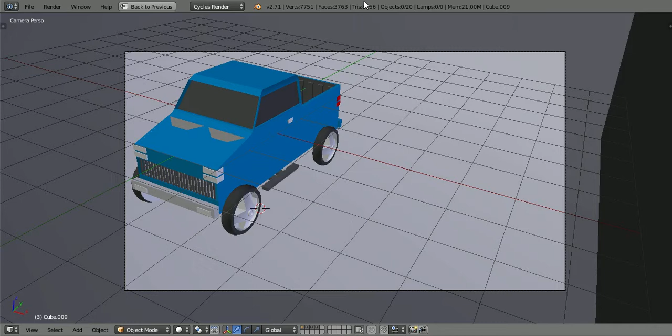So in the last episode I was talking about adding a turbo to this beast of a magnificent four-cylinder engine. It is just so fantastic.

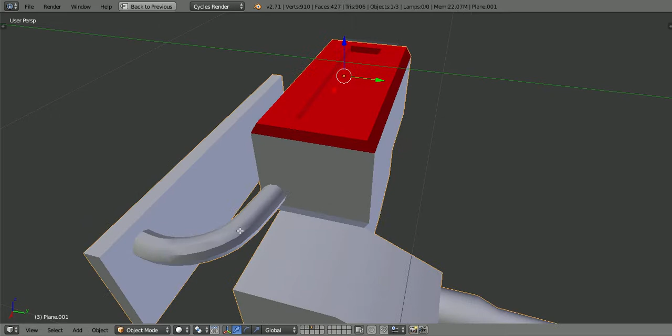So first of all we need to get rid of these pipes. All of them. This one, I'm not sure. Yeah, might as well.

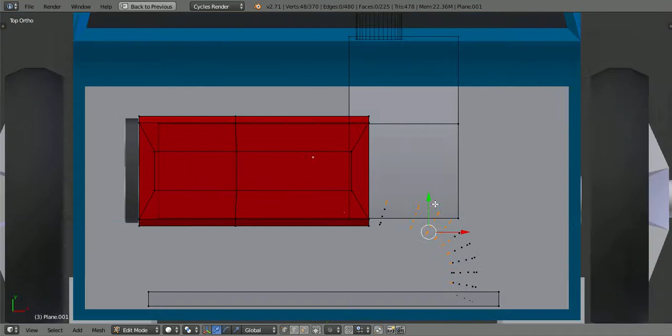Now there's not much space in this engine bay. Unless I move... Fuck, shit. One second, I keep hitting delete faces only. Ah, for fuck's sake. Not faces only, faces or vertices.

There we go. So there's not much space in this engine bay. Let me just link them up together, all the engine parts together. Now I'm going to have to force some space in here, but I'm going to need space behind the engine as well, so it's going to be a tight fit.

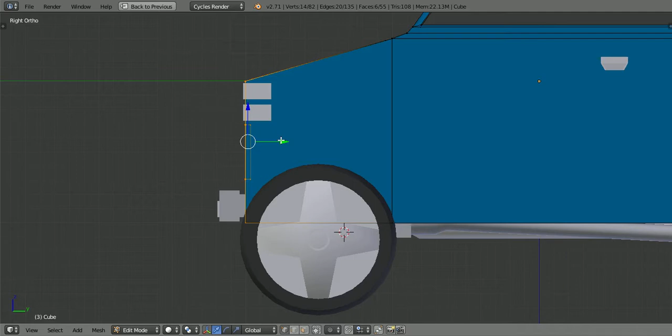Unless we make the bonnet longer, which I think I might do. So I'm going to use control and just 1, 2, 3 along the grid.

And now everything else just needs to go up 1, 2, 3 on the grid, like so. And do the same with the grill, 1, 2, 3, same with the hood, 1, 2, 3, and what else? The bumper, 1, 2, 3. I think that's it.

I'm also going to raise the front up a bit, like that maybe. Yeah. Just do the same there, and just like that.

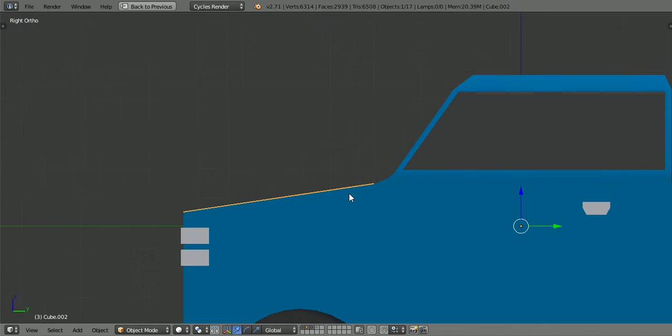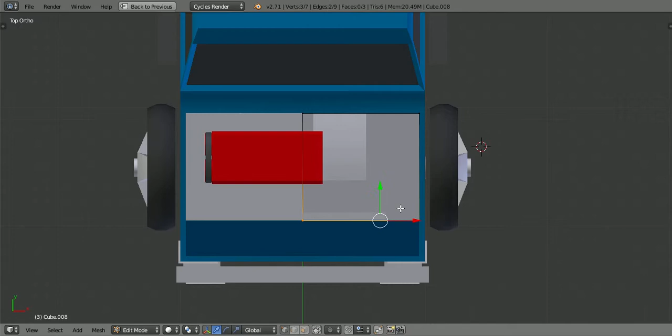I'm going to make a new bonnet. Oh, I've got to do that engine bay. So 1, 2, 3, and how many up? 1 up. And then just select that like that. And there's our hood.

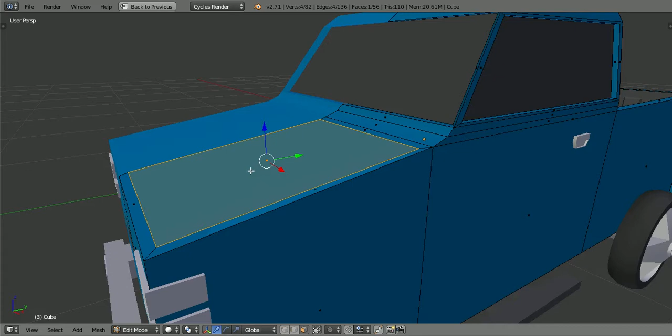And I'll just separate it, like so. I wouldn't add any cooling into this one, maybe just a center thing like this. This is way too many polys, holy shit.

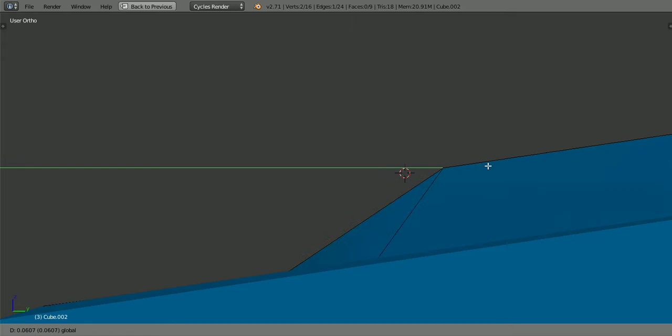But it is so totally worth it because it looks so badass. Let me just mark that as sharp - I don't know the key combination, so I just press... If you ever want to know what a key combination for anything is, or whatever a command is, press space and search it.

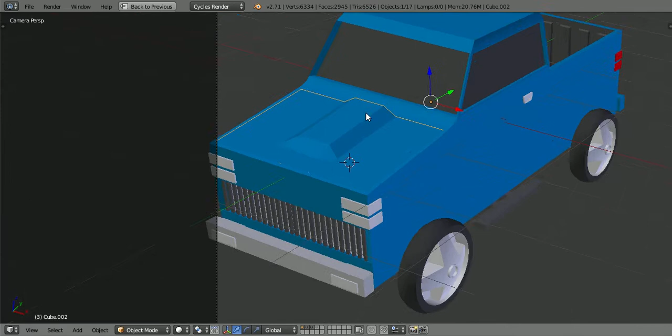Nah. Maybe we should just have a standard hood, you know, none of this hocus pocus, bocus, locus, monocus, tocus, crouching tiger, dunking hippopotamus, basketball.

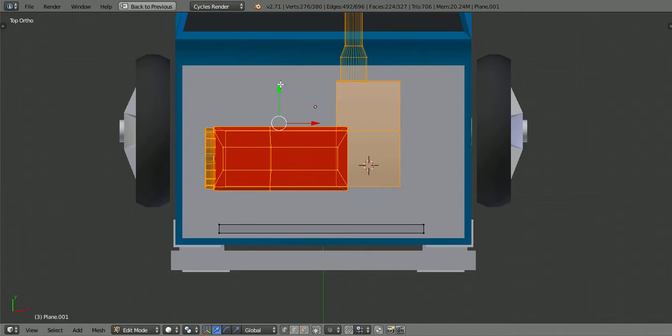And there we go. And just assign that to number 2, assign those steps back to number 1. And you see, a lot more space in this engine bay. Because now we can actually - I want to just separate that maybe, no. Now we actually have space inside the engine bay to turbocharge this beast.

Which is going to be fantastic, because this thing is just too big for this crappy engine. So...

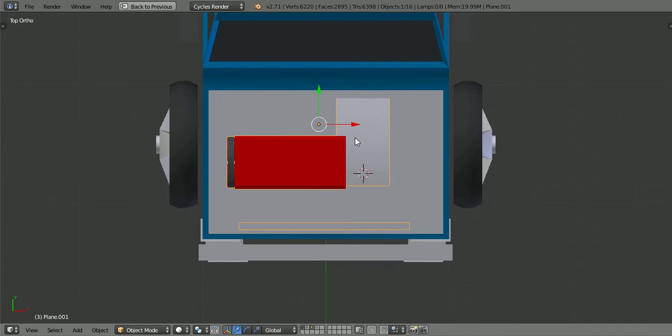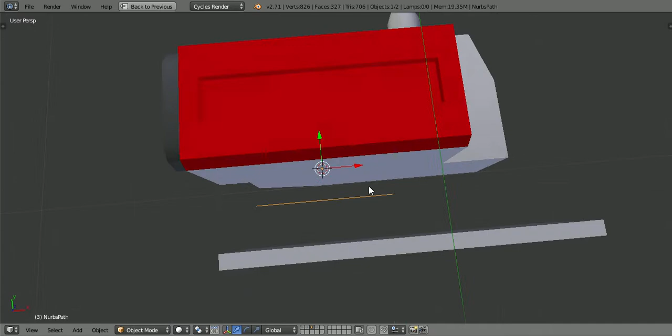First up, we're going to use this view. We are going to center on this point, and what we're going to use is a path. So we're going to go down to here, go to curve, and click path. And here you'll see this - it's got nodes, basically similar to vertices, but they are the point of each point of the curve, and you can just adjust them like that and make a curve like that. See?

Now we want to make this a pipe, of course. So if we come over here to this one here, right here, and click the curve button thing, we firstly want to select full. I'll show you why. Because if you go to depth, we're going to put in a depth of 0.01.

Hit Control A. Okay, just double check, 0.02. And give it a resolution of 3. Now you'll see it only makes half a circle, so that will only make the back, that'll only make the front, and this will make the full cylinder.

Now this resolution over here will adjust how many vertices are in it, like that. You see, you don't need any more than 3 for this, really, because the smoothing shader thing will help. Now it comes stock with 1, 2, 3, 4, 5 of these, and... just had a moment of deja vu there.

So you're going to see what happens after we've deleted them. This never used to happen on 2.49, but it does on this version. We're going to do it like this - but look, it makes the tube really weird with very sharp angles.

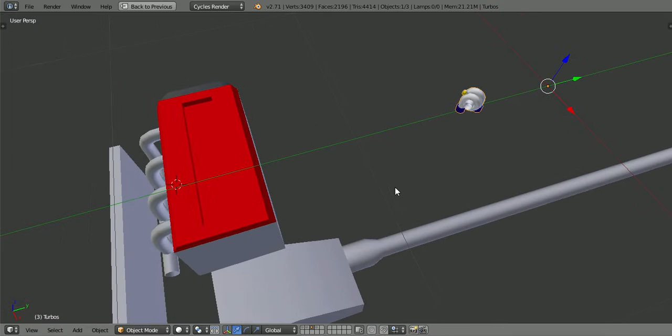That's my turbo. It's very high poly. Also, we've just realized just how big this model is.

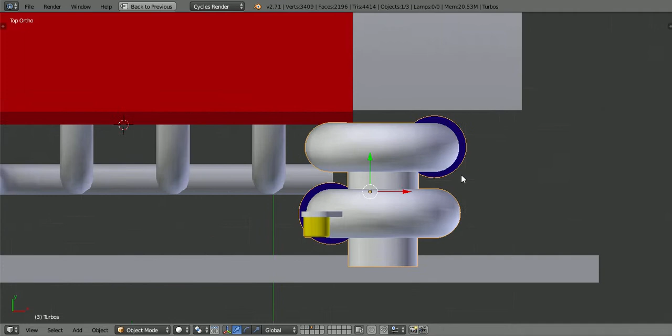Okay, what I'm going to do is hit Control Shift Alt C and set origin to center of mass - that'll origin it right to the middle, like so. I'm going to try and rotate it so it's dead center like that. Yep, it's -1, 1, minus 0.5. That's pretty much dead center - I'm not going to get any better than that.

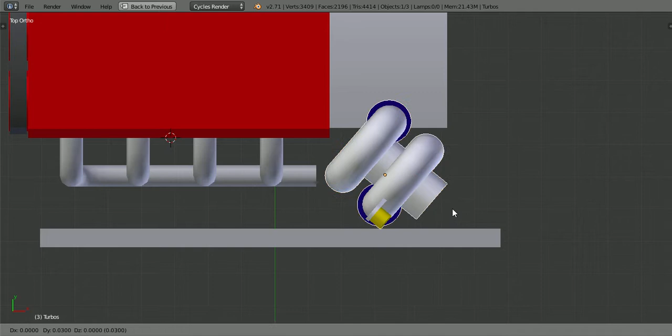Yeah, that's good. And you know what, this is the perfect size for the turbo. I'm not making it any smaller, because you know what - fuck yeah. One thing I am going to get rid of maybe is this, because this is the very high poly part of the turbo.

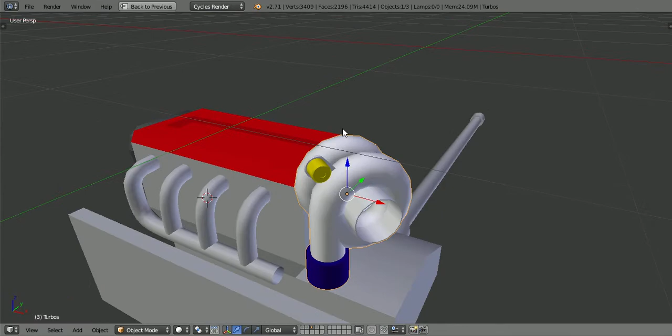I mean, look, let's select it - this part alone is 400, about 560 tris. That's quite a lot.

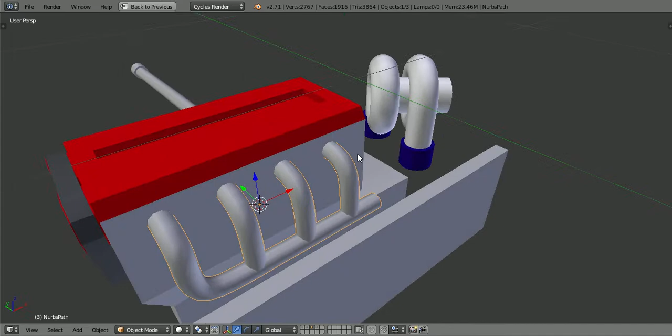It's not really that comparatively correct - that was with Subsurf 1 on. Maybe these are a bit too small, yeah. Maybe I'll make them 0.04. 0.05, hell yeah. It's actually not too far-fetched.

If it's a modified engine with such a big turbo, I guess. So I just gotta remember how it works - cold air intake, dump pipe, going in.

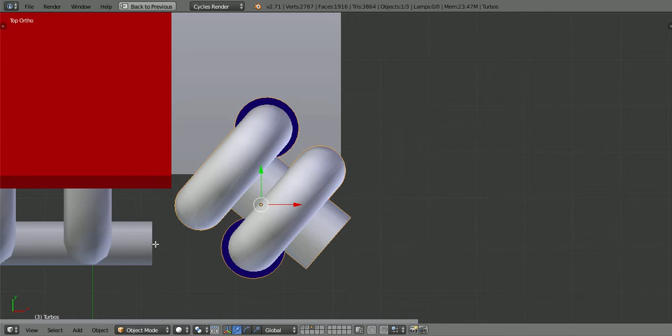Okay, good. I'm just gonna make this a separate part and separate it. And what I'm gonna do is hit H on it and it will hide it. Now if I want to get it back, I'll just press Alt H - not H, Alt H. So you press H, lose it, like that. Good.

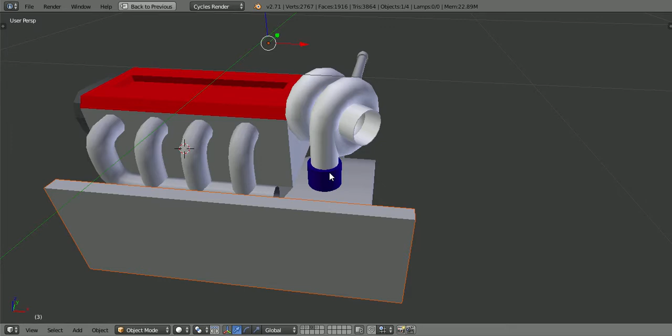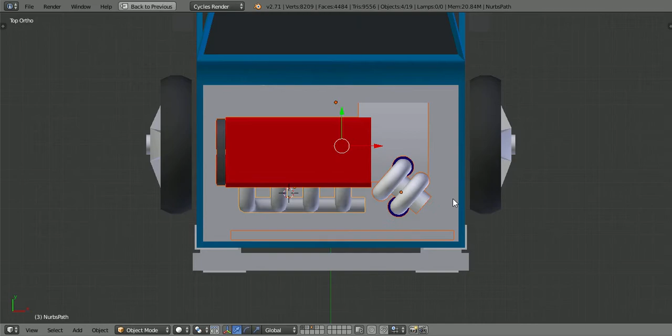Now, you just got to see where this is in the engine. This is a tiny engine - I think we can probably get away with making this engine a bit bigger. So 1, 2, yeah, like that. We're gonna say it's a big 4-cylinder engine. Yes, there we go, that's more like it.

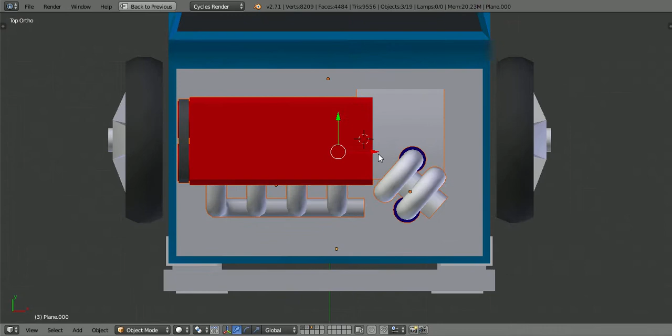Get that right up there. Do the center of mass thing. And then just kind of do this and that, because I want a bit of space for a cold air intake kind of thing.

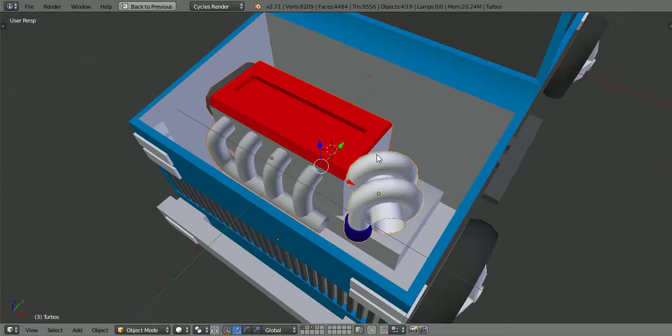The whole engine needs to come up a lot - that's where it will be in the engine bay. By the way, this engine is oversized, but it's relatively correct in the way an engine would work, so bear with me. It's a big engine, but who cares? We're gonna hide that again so we can work on this.

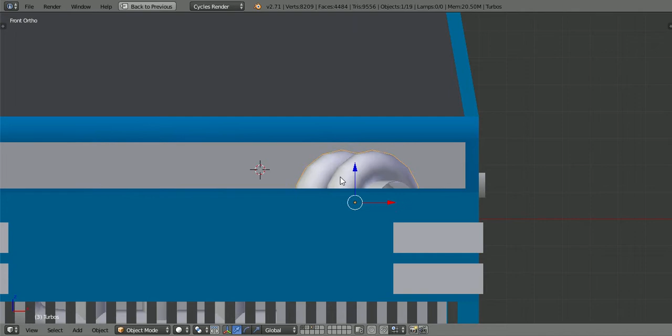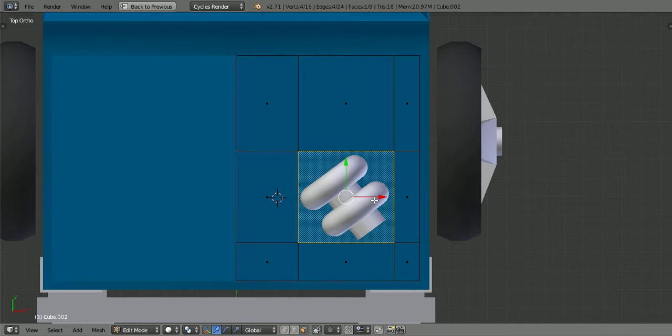What I really want to do is, I love this look - you just have the turbo sticking out the top of the bonnet like that, and it looks so good. I might use the Boolean tool for this. You just cut a hole, loop cut like this, and delete that. It's mirrored, so we'll have to make this standard. Then add a bit of detail, and just edge split. Look at that - looks good, too many polys, I'll probably clean it up later. But yeah, like a dragster, that's just so hot. See what I mean?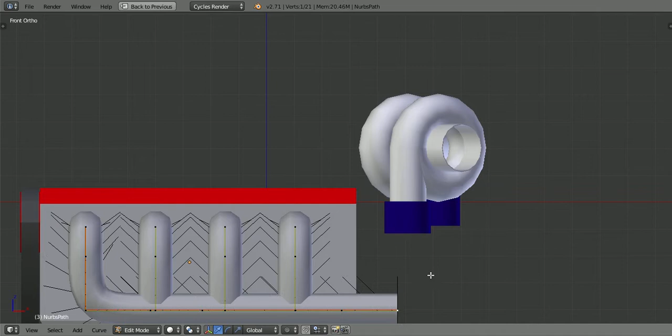Now we're going to continue with this. I might want to add not that resolution, but that resolution - just add one. It's really high poly. When you convert it back into an actual object, as opposed to a curve, you can delete most of these extra polys. So this isn't a problem for now.

What I'm going to do is duplicate it, go over to curve, hit mirror, and then I think it's Z - no, not Z global, mirror Y global. Yep, like that. And another thing you can do is if you get the wrong one, do mirror X global, then hit Y or Z or X, and you can cycle through until you get the one you want.

Oh, this isn't perfectly correct - it probably wouldn't be this equal on both sides, but one side is inlet, one side is outlet. So one's exhaust, one is intake. And then just... and that is done - I might make a bracket for that to hold it into place, but for now that's good.

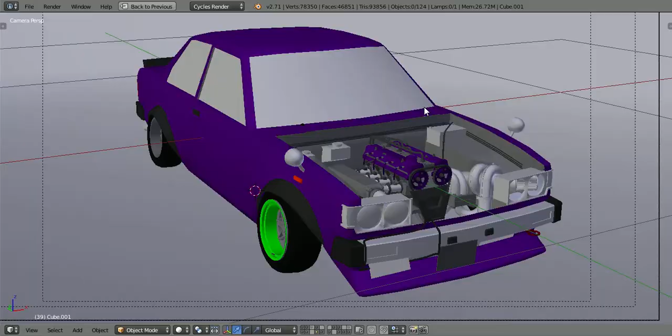And you can admire it - so here's my other car that I made. So you see what I mean? I can actually make other stuff, other than just the crap that I was making for you.

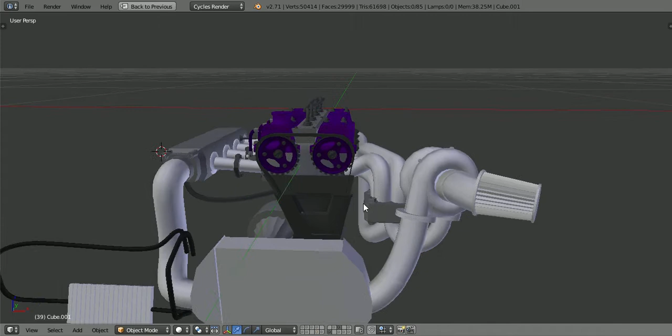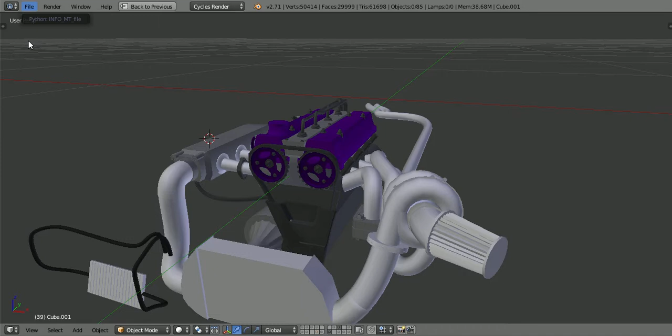Why doesn't that seem right? But it is right. Yeah, it goes out the intake, right, like that. Oh it goes, yeah, it goes to the intake, it goes out the - yes, yes, I get it now. I was interpreting it the wrong way. So it goes in like that, which is perfectly right. This is correct, this is correct.

This side needs to go into an intercooler. This is the intake - yeah, so out the exhaust, through there, magic happens. Then I get it now, I get it now, need to make an intercooler. This really isn't a simple job - well it is, but you know.

So much crap. I haven't done a base engine for quite a while, so forgive me for forgetting. As you see here, it does that, so we just need to come over here and make that about a 4. These ones we can actually make about a 5, and it should make them look a lot better. See what I mean? The intake should actually be on the other side.

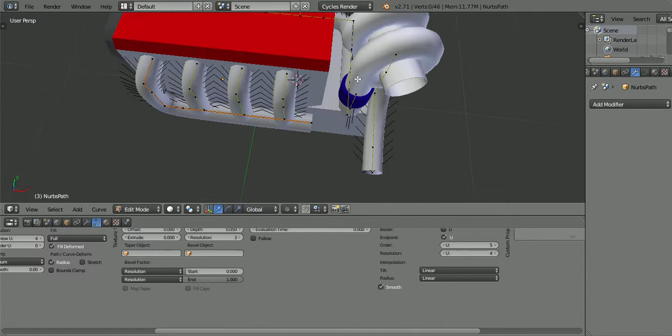Now we have to just make ourselves... you know what, we need a radiator, so Alt H and hide that. I think we're running out of engine bay. Yeah, we're running out of engine bay. I don't have tons of fucking space to do this.

So use this as a reference as the limit. But it can be done. Can easily be done.

So I duplicated that, I'm going to use this as a base for a very, very simple intercooler. Intercooler doesn't have to be anywhere as wide. It does have to be a bit thicker though, like that. Thick enough for the pipes to fit in.

But as you can see, this is perfect. This will work. It can also be mounted to the side. It doesn't need to be right in the middle, as you can see here.

Hide that again. Usually when you do this, the pipes going into the intercooler will be on the bottom, on the side. But there's no space for that.

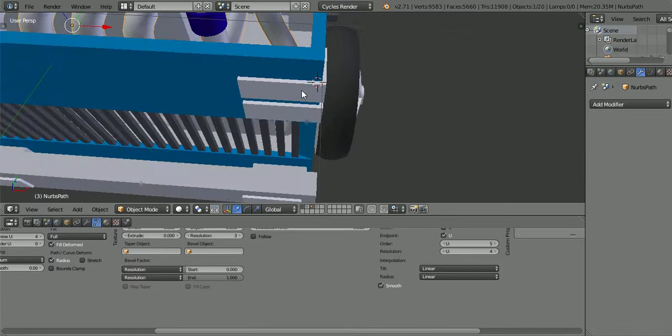Oh wow, this is such a bitch. Does it fit in the engine bay? Does it fit in the fucking engine bay? That's all I need to know. Does it? Does it? Yes, it does. The end. However, that is fucking terrible piping at the end. Holy shit.

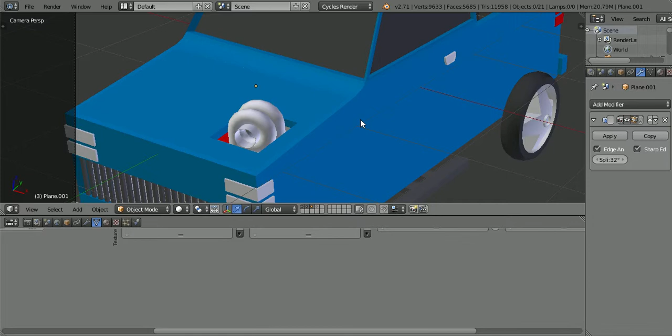And now we just need to go underneath the engine, underneath the car like this, and just realign that, and look at that. We now have a turbocharged straight four in this beast of a car, mobile thing.

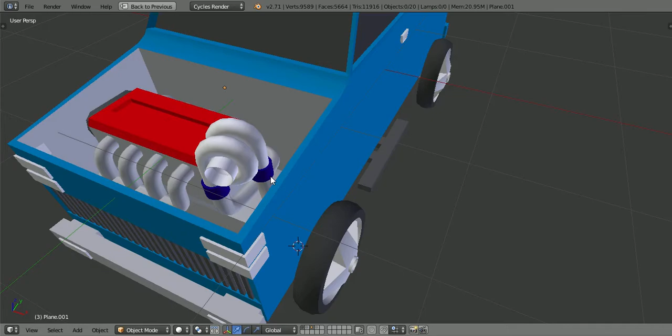It's so amazing, so majestic. I mean, look at it. Oh yeah, hit Alt H and re-show the thing like so. As you can see there, perfect, absolutely perfect. No clipping, nothing whatsoever.

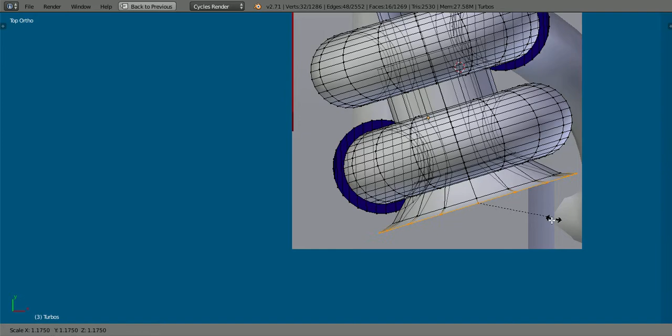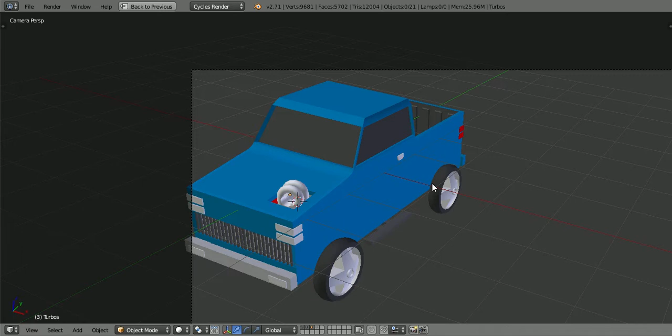Anyways, there we go. Done. Next episode, we will probably be maybe adding some front suspension of some sort. Maybe some reliefs, toolbox in the bed. Hopefully making a better exhaust. And maybe some just engine bay parts, like maybe some wiring, battery, that kind of stuff.